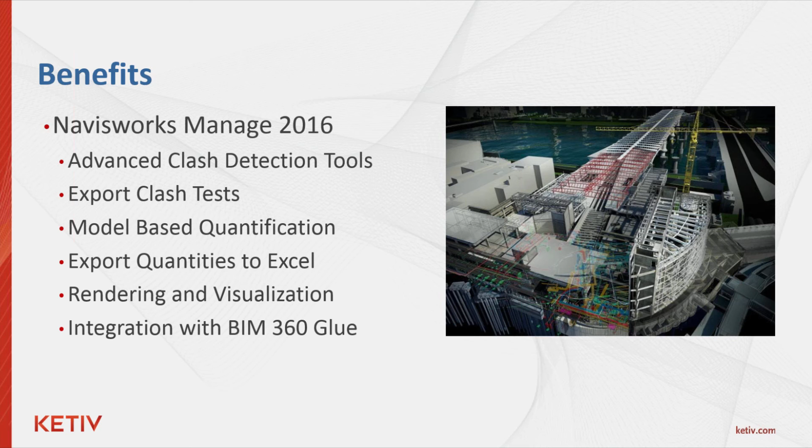And with the growing use of BIM 360 Glue, which I will talk about later in this presentation, lead architects now on building projects are starting to manage their project models in the cloud via BIM 360 Glue, and assigning the clashes to the consultants to resolve on their own, with notifications being sent to these team members via BIM 360 Glue in real time.

All right, so it's about that time to jump right in and get this live show on the road. In today's live Lunch and Learn, I'll be showing you how to set up a project in Navisworks Manage to perform a clash detection test.

I will also be showing you the various navigation tools to view your appended or merged models. And last but not least, I will be setting up and performing a clash detection test on an actual MEP model and resolving those clashes for you.

Before we begin, though, let me briefly explain the differences between the various Navisworks file types, as well as the differences between appending and merging your models in Navisworks.

So to begin, there are 3 different file types associated with Navisworks. First, you have your NWF file, which is a Navisworks project file that contains your appended or merged models that you want to perform your clashes on or take quantifications off. You also have an NWC file, which is the Navisworks exported file format that is usually from another piece of software like Revit or some other software, mostly Revit.

And an NWD file is the equivalent of a PDF or DWF of your Navisworks models or sheets. So that's more of an output of your actual project to maybe give to somebody else for review.

As far as append versus merge, the main difference is that merging a model into your drawing checks for duplicate files and append does not. So when you're combining NWF projects, you would most likely use the merge option. That way you can eliminate duplicate geometry and markups. But if you're loading single files with no linked references into an NWF project, the append option will work just fine. And that is what we will be doing today.

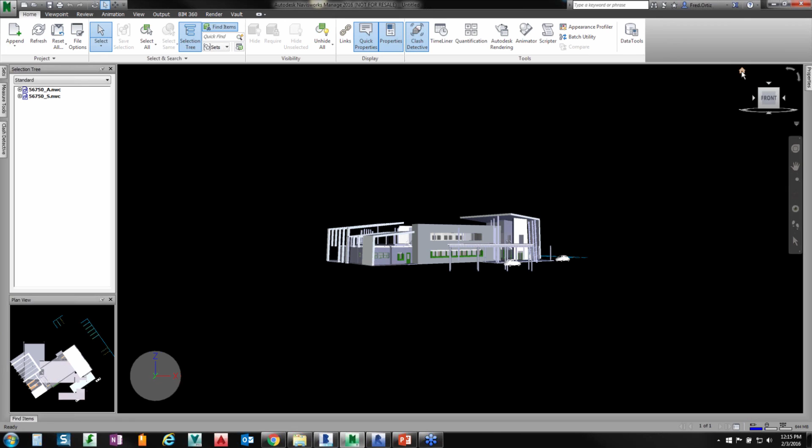If I go over here and click on this Home tab, which is a very important tool, it takes you back to your home view of your model, and that is changeable. Right now I have my home view in this location. So now I have my 2 NWC models in there ready for clash detection. But before I bring in my MEP model, which is the actual model I'm going to perform the clash detection on, let me move over to Revit really quick.

This is my MEP model in Revit that I want to export to an NWC file so I can add it to my project. What I have to do is go to my Add-ins and browse to the left, and you're going to see this tool called External Tools. If you click that, there are 2 options. The one option right here is Navisworks 2016. That'll export it to a Navisworks NWC file. And this right here is Navisworks Switchback 2016.

This is a pretty cool tool. It's been around for a while. What it does is allow you to switch back and forth from your Navisworks clash directly to Revit, and it actually shows you that clash in Revit, so you can fix it right there on the fly. After you fix it in Revit, you can export it back to Navisworks and then rerun your tests.

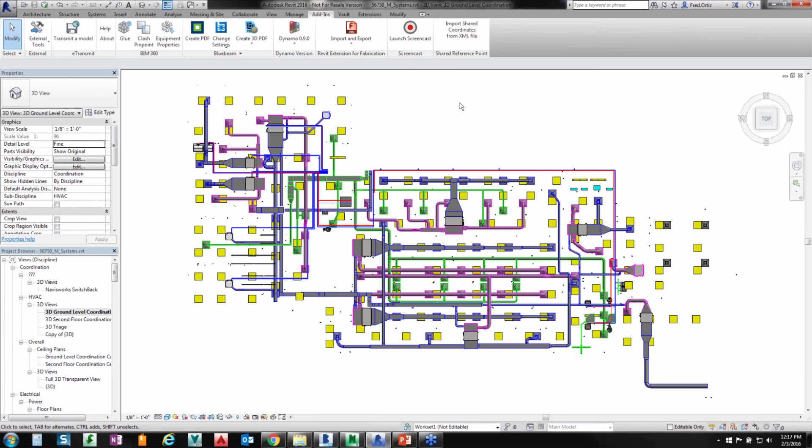So right now I'm going to make sure that tool's turned on. I'm going to select Navisworks Switchback 2016. This will activate it to integrate with my Navisworks. Then I'm going to go back up here and export my Navisworks 2016 file. I'm going to export this scene as an NWC and save it right there in my project, just like that. Right now it's converting that Revit file to an NWC file, just like that. And now I'm going to close down my Revit model.

Once that's closed down, I'm going to jump back into Navisworks Manage, go to Append up on my Home tab, and bring in that MEP systems model that I just converted. I'm going to click that and say Open. Let me zoom in a little bit.

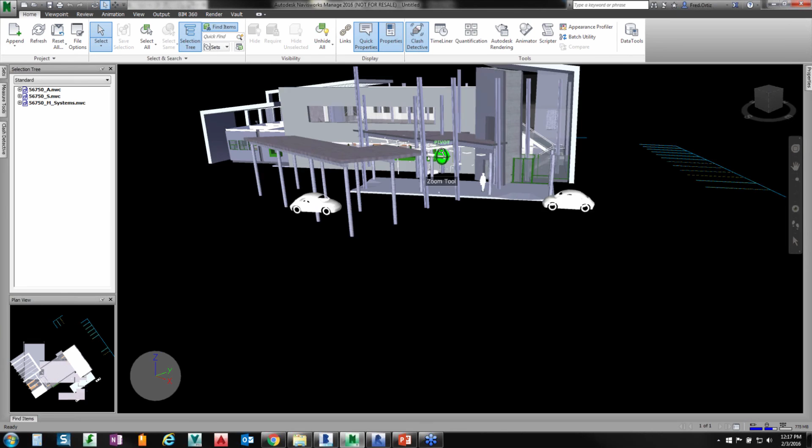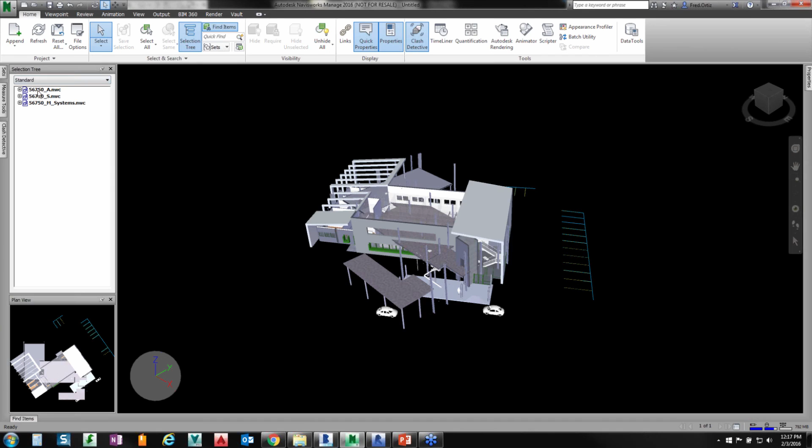If you notice, my mechanical ducts and my light fixtures are in my model, just not in the right location. So I'm going to go to my Home tab and take a look, and it looks like my architectural building is a little bit rotated for this clash detection project. So I'm going to go to my selection tree, select this model, right click, and go down to Units and Transform. If you notice, there is a rotation which came from Revit, so I'm going to change that to 0 and say OK. And now my model's lined up.

All right, so before we begin, let me get back up to the ribbon on my View tab, and I want to save this workspace. So right now, we're going to be performing a clash detection. So what I want to do is I want to make sure my Clash Detective is turned on. I have my measuring tools, my sets, just in case I need to create sets. I also have my selection tree open.

And over here on the right, I have my properties docked, which I like. And then in the bottom, I have another tab called Find Items. And this is pretty much how I like to run my Navisworks for clash detections.

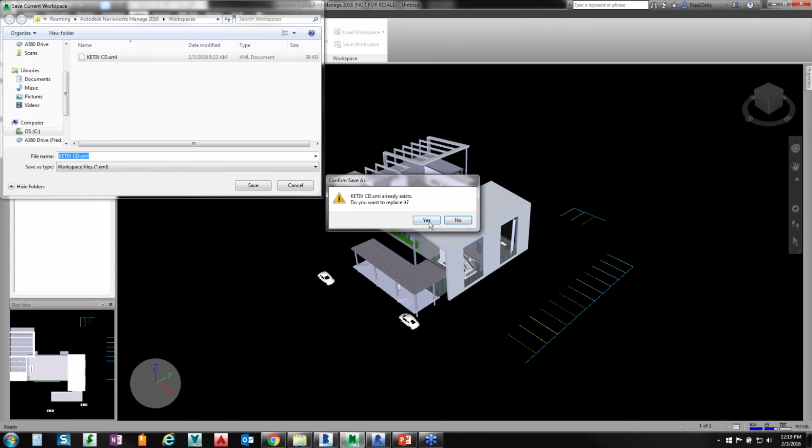So I'm going to go ahead now and close this down really quick, and I'm going to go up here to the top and save this workspace, and I'm going to name it just like the one I have saved, KETIV CD, which means it's a KETIV clash detection workspace. So I'm going to go ahead and save that, replace it. So now every time I go to that workspace, it's only going to pull up these tools that are on my screen for clash detection.

All right. So a couple more things I want to show you before we actually jump into the clash detection test. Down here is another one of my panels I like to have open. This is my plan view. So this kind of helps me locate myself when I'm browsing through my model and looking at different objects. Sometimes you can get lost in there. So this kind of gives you a general idea of where you're at in your model.

Down here's my UCS, and over here is where we're going to concentrate on our navigation. So like I told you, this is your home tab. So if you ever get lost in a model and you're not quite sure where you're at, you just got to go click your home tab, and it takes you right back to an overall view of your project.

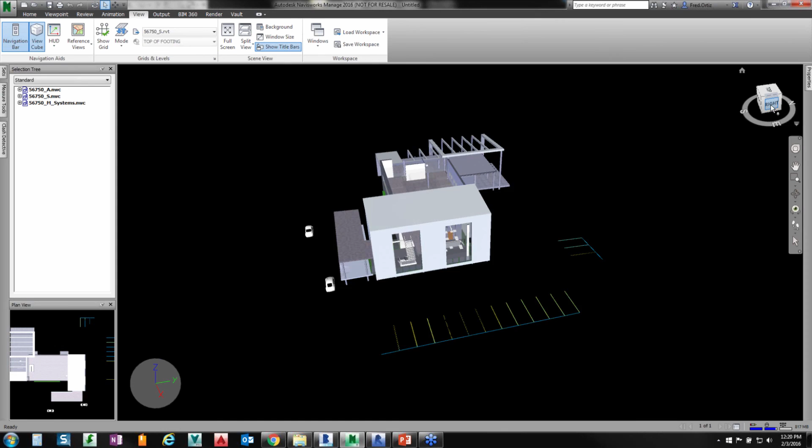This right here is your view cube. This is where you could actually rotate it just by grabbing it with your left mouse, clicking it. You can rotate it around. You can select certain sides, the right side, front. You can go top, spin it around this way. So this view cube gives you options as far as rotating and orientating your model.

All right, so I'm going to go ahead and press the Home tab to get back there. And let me go down here to my navigation bar. So right here we have our navigation wheel, which I really don't use, but this is another option just to navigate through your model. Right below that we have our pan tool. So if I click that, I could actually just come in here and pan around my model.

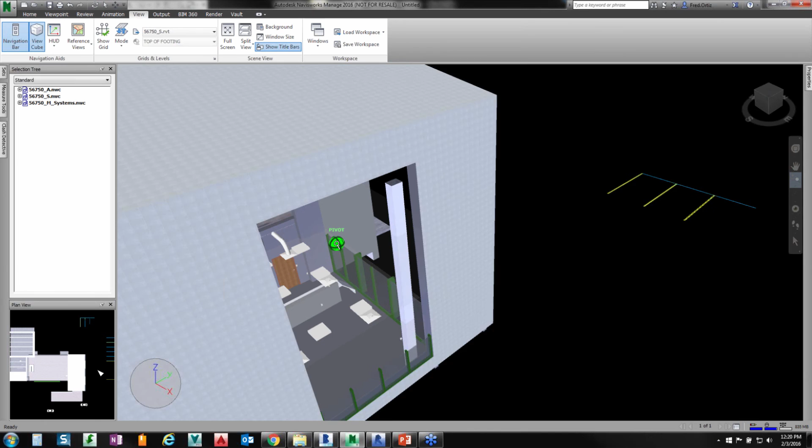Right below that we have our zoom tool. So if I want to zoom right into something, I could just keep zooming in like that with that tool by clicking with my left mouse button, changing the pivot, just like that. If I go back to my zoom tools and do a zoom window, I could actually do a zoom window on an object to get closer into that.

If I come back to my zoom tool and I want to do zoom selected, that'll take me back out to my overall view again, just in case I do get lost. And then there is also another view for zoom all, which kind of does the same thing. All right, so right below the zoom tool we have our orbit. So if I click on orbit, this actually lets me orbit around my model just with the left mouse click, just like that.

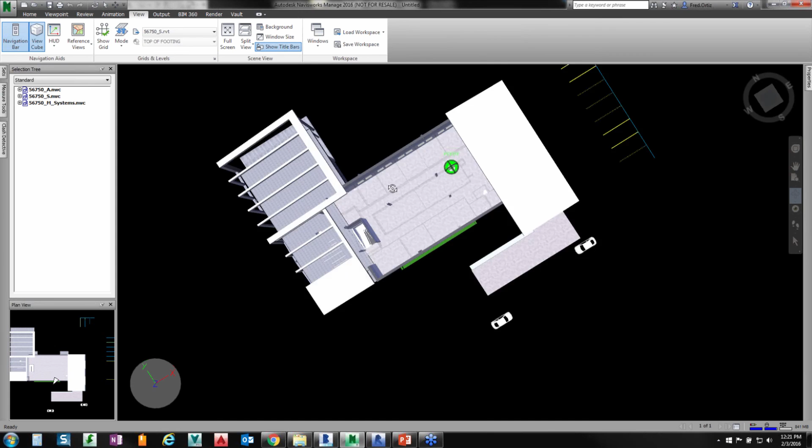You also have a free orbit that just kind of goes freely around. It looks very similar, but it feels more of a free orbit kind of tool. And then we have our constrained orbit, which kind of just goes along the axis. It can't really go up and down, just around and around.

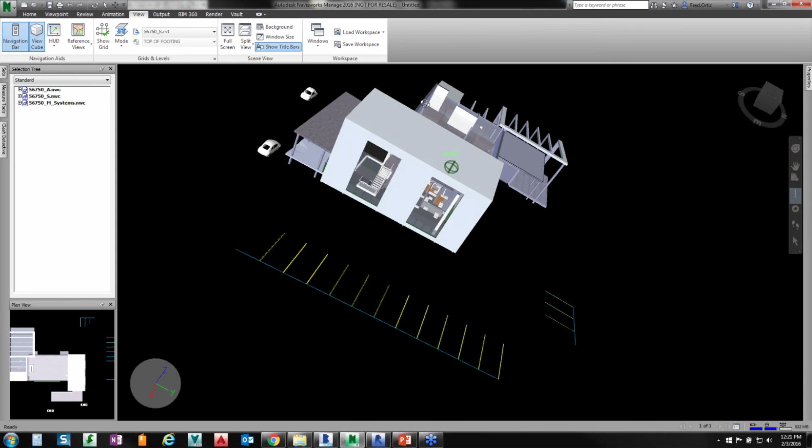All right, so let me get back to home. And let me move on to our next one, which is our look around tool. So with this look around tool, it just gives you another option to kind of look around your model, just like that.

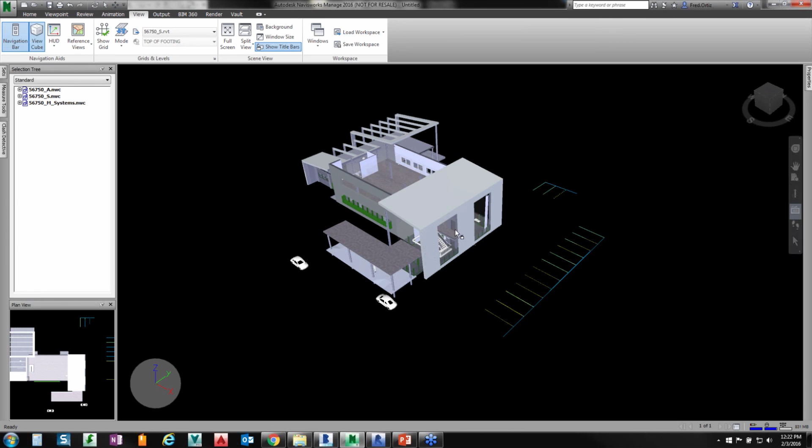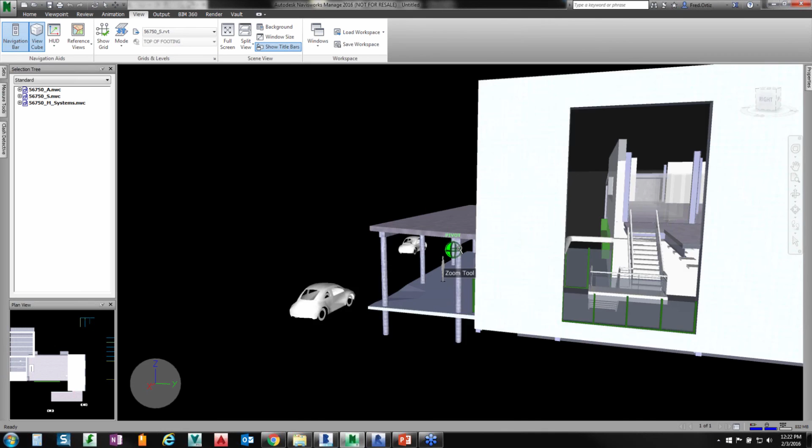We also have our look at, which is if I click on a surface, it'll take me right to that, and I can zoom in, and that puts my pivot point right there. So if I want to actually rotate, my pivot point stays right there, and I can rotate right around it. It's a pretty cool tool. If I go back over here and do a focus, that just lets me focus in on an item, and I could actually set my point there and zoom in, orbit around that point, just like that.

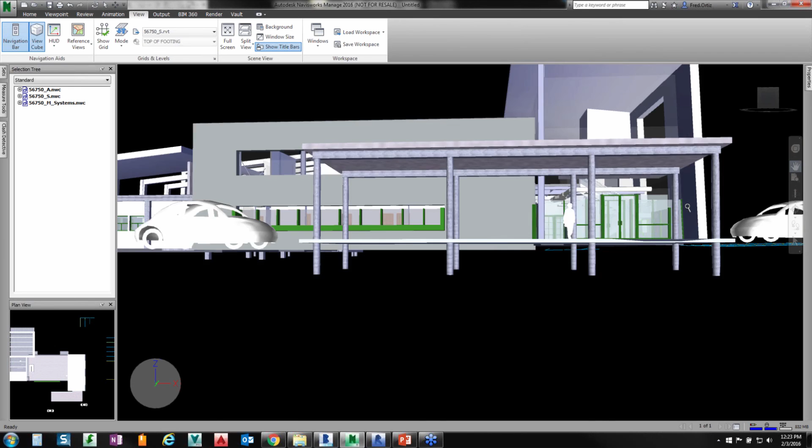All right, so below that we do have our feet, which we could do a walkthrough on our model. So if I wanted to do a walkthrough over here, let me zoom in a little bit. So if I wanted to click on the feet and do a walkthrough right here, I could just click my left mouse button and kind of walk through really slowly. And if I do hit the shift, it goes a little bit faster, and this will kind of take me right through my model. I'll do a walkthrough to maybe check on some clashes that were resolved or that need to be resolved.

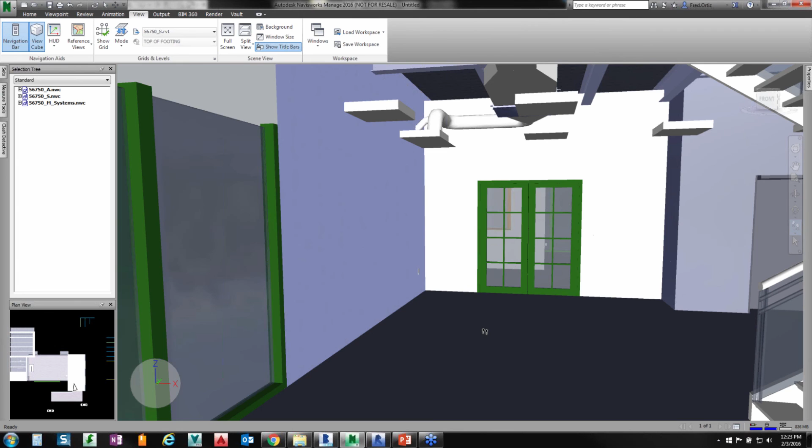So this is a pretty cool tool. Let you navigate around the building. See if I could go up the stairs. There we go. So once again, if I get lost in a model, I could always come back up here and just select my home tab, and that takes me right out. All right, so the last one over here is our selection tool. If you ever get stuck in a command, this is a good way to get out of it. Just click on that, and this will allow you to select an object on your screen. All right, that's pretty much the gist of the navigation tools.

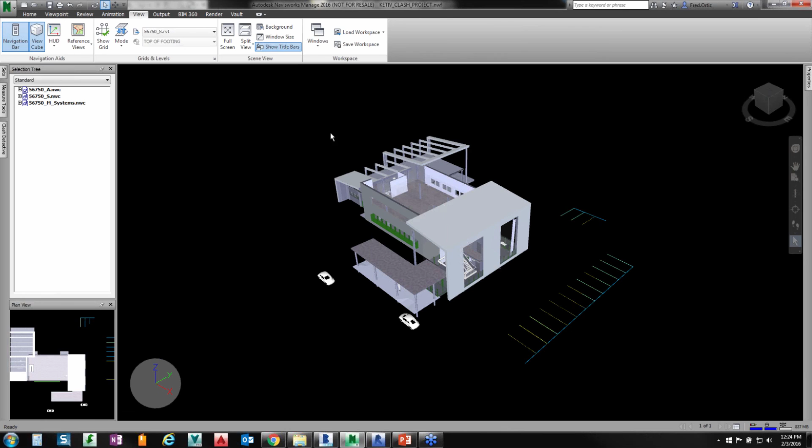So let's jump right into our clash detective tools. So what I'm going to do now is, since I have my model ready to go, let me save it. I'm going to save it to my project. I'm going to call it KETIV Clash Project, and save it. All right, so now I have my model saved. I'm going to just go over to my Clash Detective tools and open that up. And what I'm going to do right now is I'm going to pin it so I can see my model and my Clash Detection tools.

So first, what we want to do is set up our Clash Detection set and then run a test. So I'm going to go to my Clash Detective tool and just pin it so that we can see the screen of our model and the screen of our tool set. And what I want to do now is click this drop down. What this does, it just shows me the different points in my test. So we have our status, our clashes, new, active, reviewed, approved, resolved. And right now we don't have anything in there, so we have to add a test. So I'm going to go over here to the top right and add a test for this clash detection set. And I'm going to rename this to something.

I'm going to call it lighting versus ducts, because I want to check my light fixtures versus any ducts that may be in my MEP model to see if there's any clashes. So I'm going to name it that. All right, so after I give it a name, what I want to do next is go to my selection tools and choose the models we would like to perform the clash detections on. So if I go down here and select on my select tab, this brings up my selection A and my selection B, which are the models I want to clash against each other.

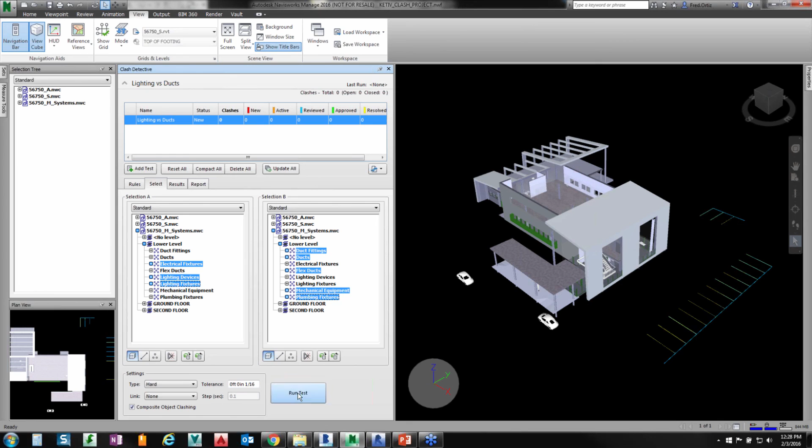And right away, you notice we have 3 clashes that came about. So we have clash 1, clash 2, and clash 3. All right, so with these clashes, I'm going to go over the display settings of these guys.

So if I go over here to the right of this clash test output, we have our highlighting over here. So what highlighting does is it goes back to those colors I showed you in the options. So if I want to take off the highlights for those, I can, but I kind of like to leave them on because it does give more color and it makes them pop a little bit more. You can also highlight all your clashes. You could also use the item color from the model.

All right, so down here, going down more, it's our isolation. So right here I could click on this and it kind of dims the model in the background, if you can see that. And this one actually hides everything in the background. So you just see the 2 items that are being used for clash detection.

I kind of like the dim other, so I could actually see what's going on in the background. And I like it for transparent, because right now if I take that off, it's going to be too hard to see what's going on. So I like to click that transparent dimming, and I like to leave on auto reveal.

And going down one more to viewpoint. So if I click on this, I want to auto update my viewpoint, so every time I do change my view over here, it'll auto update it for me. So that viewpoint is constantly being saved and updated for me all by itself, which is a cool feature of 16. And I like to have this checked on, which means to animate my transitions.

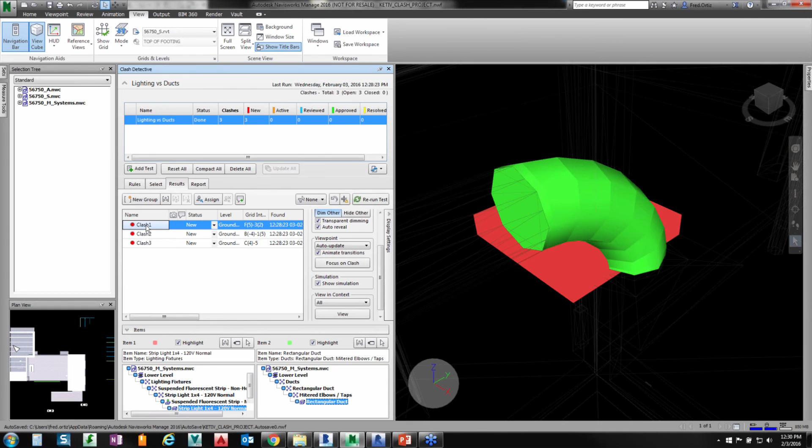So when I browse back and forth to different clashes, it's kind of animated for me, which looks kind of cool, just like that. So there's the animation feature. And if I'm over here messing around with this and I want to kind of focus back on my clash, I could just click focus on clash, and it'll take me right back to my model. Just like that.

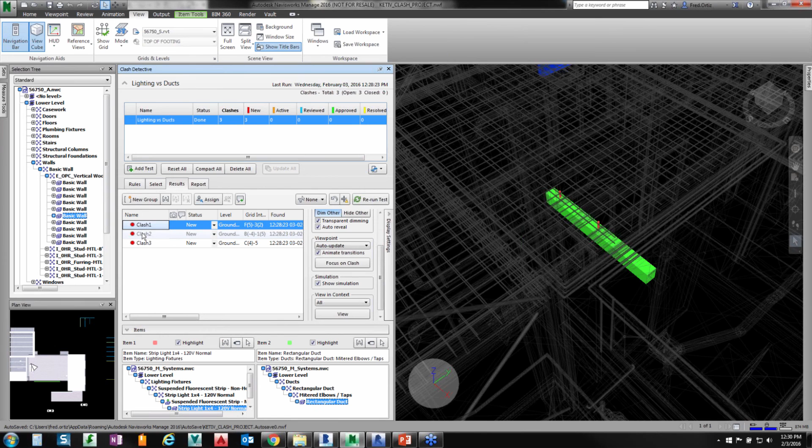On right here is my simulation tab. I do want to show simulation. That's just the cool stuff it looks like when you're transferring back and forth. It just gives it a cool little transition look. And view in context, I want to view all.

All right, so once we have all those settings to our desired choice, we could go ahead and start assigning these clashes to a user and then commenting on them. So what we're going to do right now is I'm going to click on one of these clashes. Let's click on this guy right here, clash number 2. And I'm going to assign this to somebody. So it's an MEP model, so maybe I'll assign it to an MEP consultant.

And you can put a note there. Please, I'm a nice guy, right? Please move the light fixture away from the duct. Just something like that, and say okay. I can put a comment, same comment, move light fixture away from the duct. Say okay. All right, so now we have that clash assigned, and we have some notation on it.

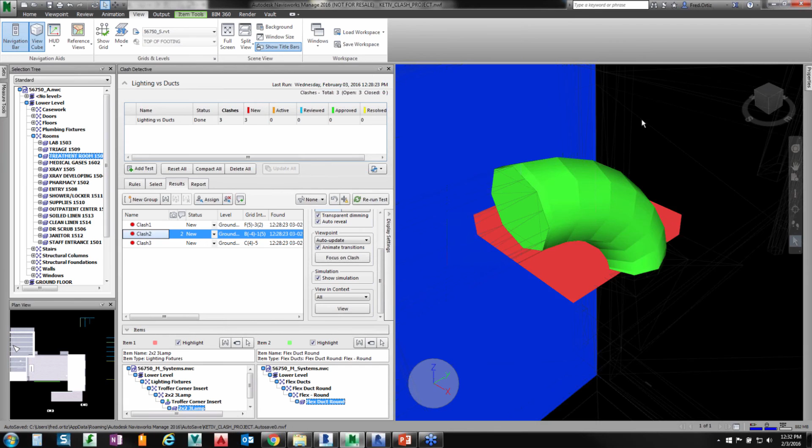We could actually go ahead and try to fix that clash detection. So the way we're going to do that now is I'm going to resolve this clash detection by using that switchback feature I showed you guys earlier. So over here, go back over here. Just hide that and kind of do a zoom around and see right there, there's a clash. This duct is actually going through that light fixture. All right, so I'm going to save that viewpoint automatically right there.

So now what I want to do is I want to go down here to my items which are available to me. And since I'm on this clash 2, it's highlighting those two that are involved, this lamp and this flex duct round. So I'm going to click on one of these guys, and up here on the right is this little icon. This is called switchback. And what this will do is it'll take me back to Revit and open the model that's being affected where I could actually go ahead and fix that clash. So let's go ahead and click switchback.

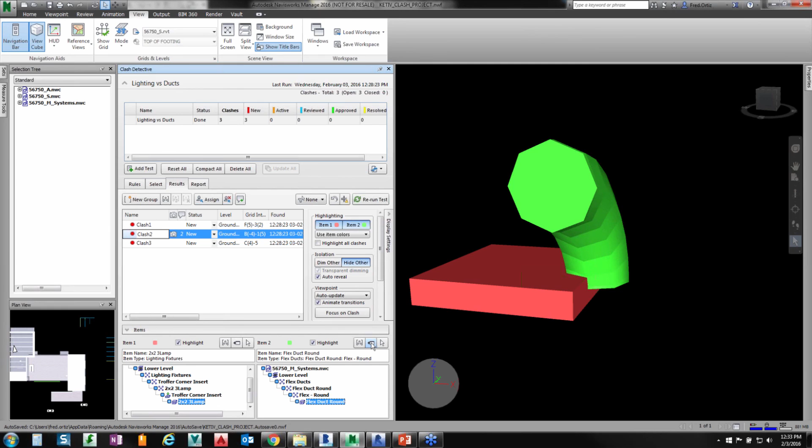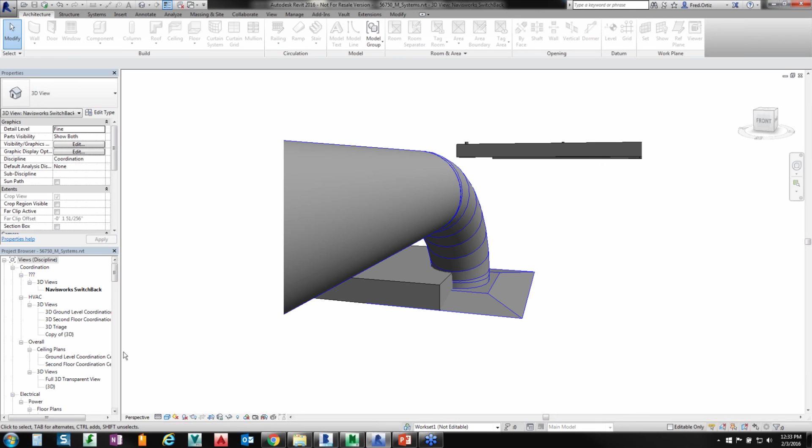If you notice, my Revit down here is blinking. And if I click on that, it actually opened up that specific view of that clash right here in my model. So if I wanted to actually come in here and move that over to fix that clash, I can, but I probably want to browse to a better view of this area so I could get a nice move without any interruptions. So there it is right there, see?

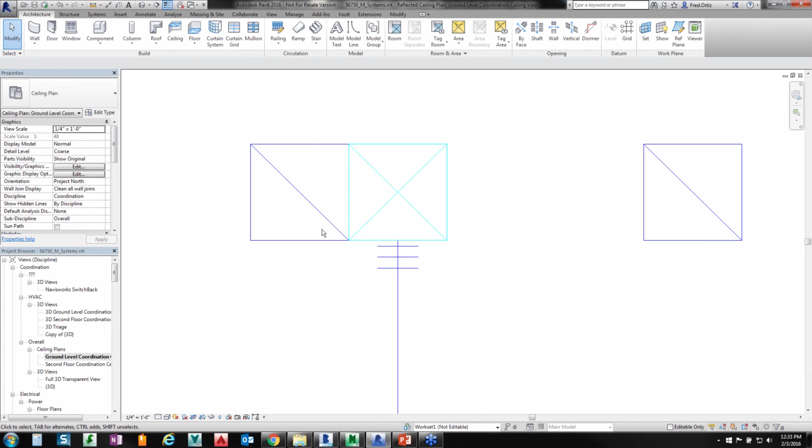So this light fixture is right on top of that duct, so I need to probably move it over, maybe a foot. So I'm going to go ahead and just move this with the move tool in Revit and just type in 1 for 1 foot. If I zoom in on that, it looks good. It looks like it's moved away from the diffuser and it's probably sitting right on the grid. So with this, I'm going to go ahead and sync with Central on this guy.

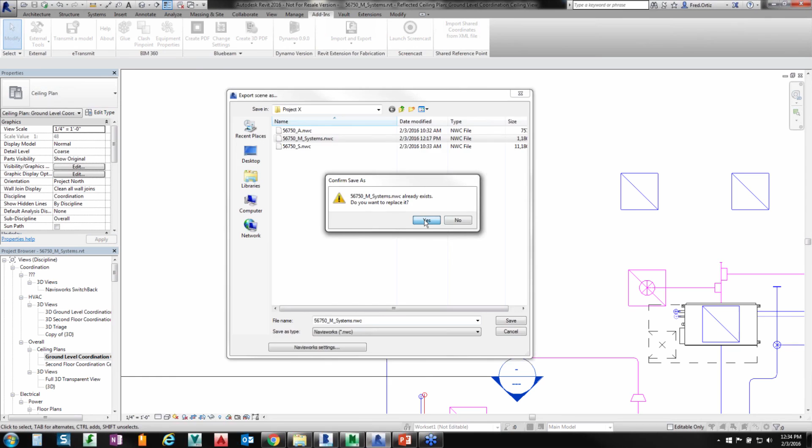Save my change. And now I want to go to my add-ins tab up here, and I want to go to the left to my external tools. I just want to click on this one more time to make sure my switchback is working. And then I'm going to export this changed model according to that clash, and then resave it over this NWC, just like that. So right now I'm actually replacing it, but while replacing it, it's not messing up my link from Revit to Navisworks. It's actually maintaining that link, even though I'm overwriting it. But what it's doing is it's sending that new model with the moved light fixture to Navisworks.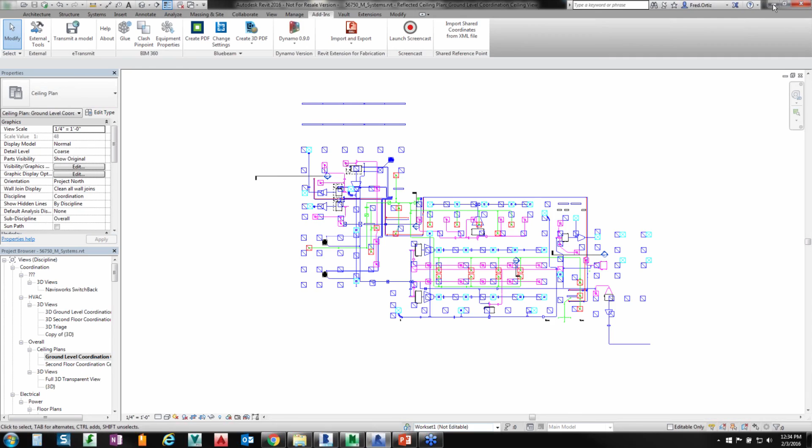All right, so let me minimize this and go back to Navisworks. All right, so now once I'm back in Navisworks, I want to go up to my Home tab and select Refresh. And come back over here. Click on my viewpoint. There we go. Now you can see that I moved that light fixture away and it got rid of that clash.

So what I want to do now is I want to run a retest to make sure that clash has actually been resolved. So I'm going to go over here to my Run Retest button right here on the right. Click that. Look at my clash 2.

It tells me it's been resolved, what level it's on, the grid, and what time this clash was found. If I go up to the top and take a look at my test criteria, it tells me I had 3 clashes. 2 are active right now, 0 are reviewed, 0 are approved, but I do have this one right here that was resolved.

See that? You also notice that the resolved yellow color matches this clash, which means it has been resolved, which is what we were trying to accomplish.

So now if I wanted to go ahead and fix the rest of these clashes, I would just follow the same steps I just did and resolve the rest of them. But I'm not going to do that today. I just wanted to show you how to get it done, that it does work, and show you the powerful connection between Revit, Navisworks, and BIM Glue.

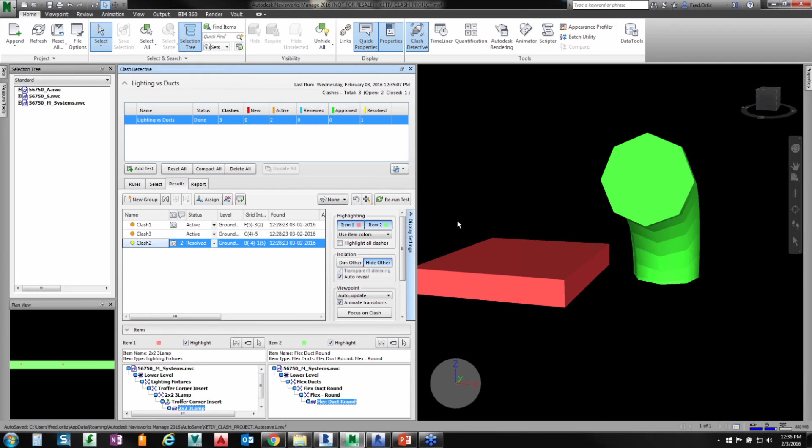So now that I showed you this clash detection test and showed you that it was successful, let me jump out of my Navisworks really quick. Like I told you, after my live session I wanted to give you a sneak peek at Navisworks and BIM 360 Glue interoperability.

Navisworks is still pretty much the same powerful solution it always has been, but now it's connected more tightly with BIM 360 Glue for advanced analysis capabilities such as quantification, clash detection, and construction simulation. All advanced analyzed work can still be executed in Navisworks, with the changes being merged with the models in BIM 360 Glue.

So if you remember, I showed you that tab—let me pull it up really quick. Over here on Navisworks, I did have that BIM 360 tab. This is where you could actually merge your files from BIM 360 Glue if you're using that tool. It's all integrated in here, which is pretty cool.

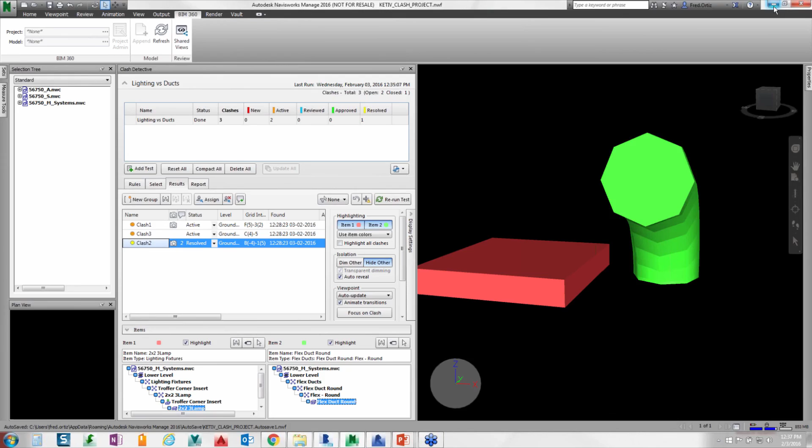The deeper integration between these two softwares brings greater collaboration tools and a more connected experience to Navisworks users. It also brings rich Navisworks tools, data, and workflows directly to BIM 360 Glue. Navisworks 2016 provides built-in capabilities, making Navisworks a true client of BIM 360 Glue.

There's no plugins. So with these two softwares being used, you could actually append and align models from BIM 360 Glue in Navisworks and then save them back to BIM 360 Glue as a new merged model, creating a collaborative workflow for other team members to access and mark up.

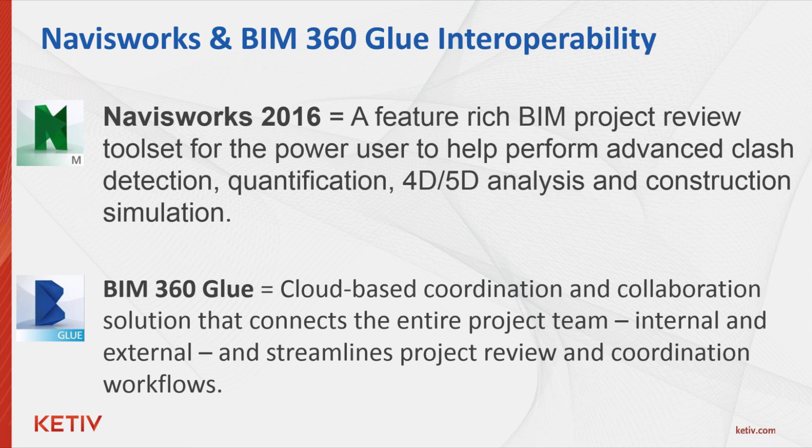So the Navisworks data can be saved in BIM 360 Glue, and it's accessible by other connected Navisworks users via the cloud, which is important. Since a lot of new technologies are moving towards the cloud, Navisworks is moving the same way with the direct connection to BIM 360 Glue.

As far as our summary, that concludes my intro to Navisworks Manage Lunch and Learn with a sprinkle of BIM 360 Glue in it. So let's go over what we talked about and what I showed you today before we jump into our Q&A session. We talked about the benefits of Navisworks Manage, the advanced clash detection tools with the ability to export your clash detection tests.

We talked about its ability for model-based quantification takeoffs, with the ability to export your quantities to Excel to possibly be used in another piece of software for estimation. We talked about rendering and visualization of your models with the powerful tools to create impactful renderings that will better communicate your design intent and show the final results of your real project.

And last but not least, we dug a little deeper into the integration with BIM 360 Glue and Navisworks, which allows you to manage your models and team members' models in the cloud, with the ability to append models directly from BIM 360 Glue into Navisworks, which is pretty cool.

As far as our live session, I showed you how to set up a project, navigate through models, and set up and perform a clash detection test using Autodesk Navisworks Manage. As far as the Navisworks and BIM 360 Glue interoperability, I gave you a sneak peek of that and we talked a little bit about what it does.